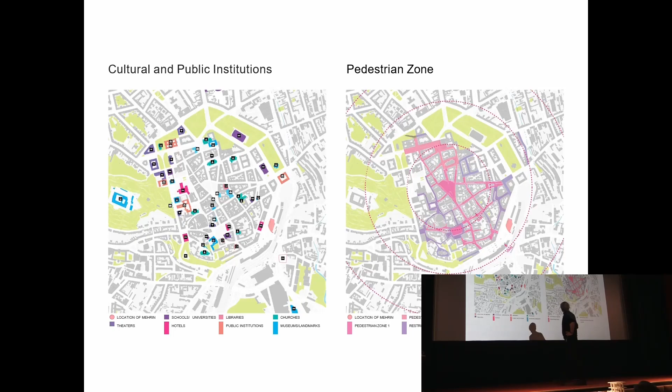It's a part of the Ringstrasse area. It is next to all kinds of political institutions, and you can walk to it. The Green Ring is not completed in a historical way. It has this kind of monument that passes by and which is beautiful and makes your story.

It is also part of the Jewish history, and for me this was kind of a challenge to understand it. How many times in your life can you get the opportunity to think about this disaster from 70 years ago, and formulate a certain kind of opinion about it? That is what you are trying to raise with this subject, and I find that wonderful.

That is challenging, and I could not say no. What I found beautiful is that the site is not just surrounded by Jewish sites or former Jewish sites, but there's also a collection of them that is in itself already worth exploring - worth understanding why it was there, how it looked, and what it has given now also these days to you. And yes, also Tugendhat belongs to that.

The reference is actually much deeper than you can imagine, and then you try to symbolize it sometimes in this kind of manner. Is that good enough? The challenge of Mehrin is to see it wider. The Moravian Jewish history is even more - you can say that maybe 40% of Brno's urbanism was done by Jewish developments. And how loudly can we say that?

Because when the Jewish population left during the war for all kinds of reasons, afterwards this expropriation continued in the communist time in a strange way, so you get a double reaction on this situation, much stronger than anywhere else in the world. That makes a necessity for this kind of living with it, unveiling those paradoxes and all the sentiments that are in it.

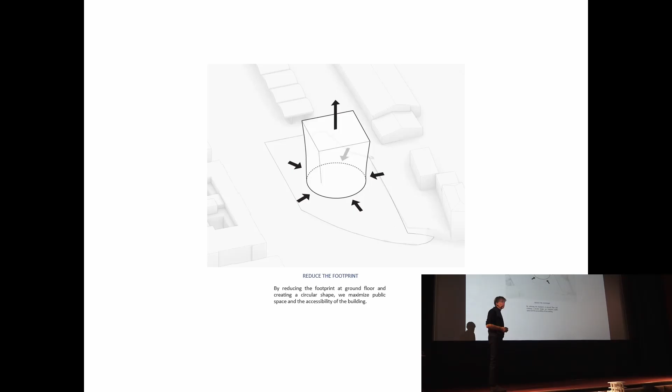So we reduce the footprint to give some space around it, so that when you cross a zebra crossing, you first find a kind of garden or plaza where things could happen. Do it as abstract as possible, so that you can walk around it - no corners, please.

And then stretch out to maybe a new viewing platform where I can notate all this history. Actually I walk on a glass map where I can see which town was doing what - interactive - and it could turn into this platform that you want to go to and have this view over the city that's described, and the landscape that stretches to all ends. And somehow, if you make that as a journey from its abstraction ultimately to its cohesion, then maybe there is a message there.

Maybe it's also an attempt to talk about minorities in a general way, to give them the space to note data, to make those maps, and to feel it then in this collective platform where you can dance on top of the map.

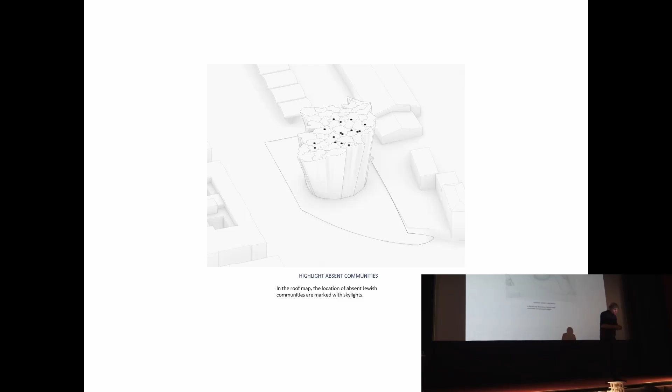In that map, there are all these kinds of towns. They can light up in the Jewish epoch. Okay, let's give them a place. Let's also see them as things that you can stretch down towards the kind of hall.

So when you enter on the lowest floor, there's this kind of new cupola that's constructed by lights to a distance, and that gives a signal that it is a Jewish institution, but it's more than that.

It also dissolves maybe in this new kind of plaza on the ground floor, and it points at something in heaven. Here you see how the domes come together in this new cupola, how the entrances work, and how it also opens up the veil by these kinds of new plazas that are there. You can insert the transport into these cupolas, and the different programs are arranged.

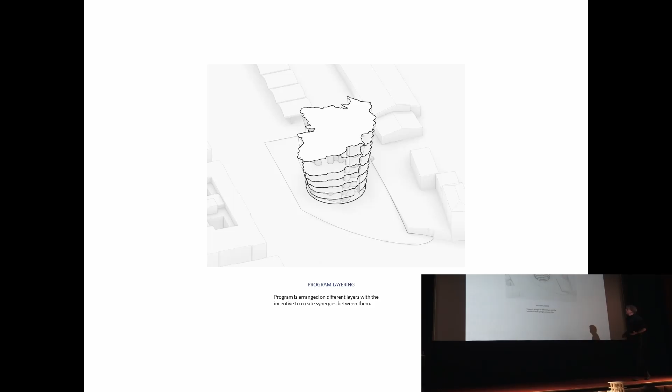This is a journey through the documentary system, through the library, through the education part, and through the museum itself, from the bottom to the top, coming out on this dance floor at the top, positioned in the ring.

That's the construct - a paradox of the past and of the future is somehow there, suggesting abstraction and being concrete as much as possible, so that it escapes from the kind of corporate buildings normally done for these Holocaust institutes - it escapes, but not too much.

I'm not going to make a kind of monumentalism out of it. It is a subtle suggestion that makes that possible and that creates that journey from the bottom to the top.

Where could we imagine such a kind of space then? It adds to the cupolas in Brno's culture of the past.

And then here, the small film - how that could be, that feeling, this veil that comes from abstraction to concreteness, how these stars of the past are somehow illuminated from the top, and how they ultimately illuminate this new cupola in your city - let's say, our dream.

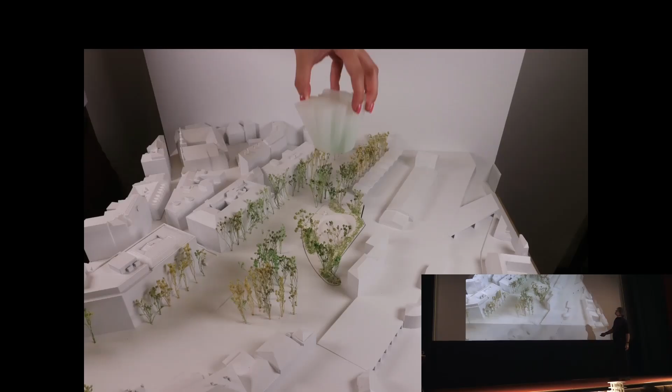And that leads then to a position that on this spot was what we tried to do, and to give this platform to the world that blends you with the environment.

And when you walk around it over time, this is how this veil shows itself to the surroundings. You can see it when you drive around on your bike or in your car every day, as something that then almost moves, illuminated from below. This is how it can then turn into a lantern in that city.

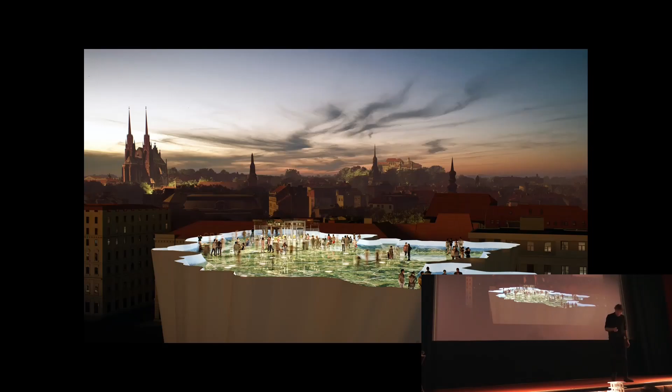Suggestive, yes, as a kind of new lamp that would exist there, leading to this kind of party on top, placed in this area. I hope it gives a construct for how to live together, how to go through this journey, ending up in this glass map that becomes a platform for your city, helping understand the position of Moravia in the wider context. In the railings, the story goes further, pointing at Warsaw, or at Amsterdam at a certain moment, to describe this study even more when we make this kind of suggestion.

So what's next? You have chosen for this at the moment. With all respect, we are friends, but honestly I think it's a bit of a pity. I'm a bad loser, I know. But is a spiral really the ultimate way of symbolizing such an anachronism of time? Is this unveiling what could be done? Just a question. I know it's late, but it would be good to discuss among you what is the best you can have, and how to create, in next steps, a little help in keeping on with it, making these kinds of objects that discuss your situation and your position in Europe and in a wider context. So what is next is my next chapter on it.

It's as if almost the evolutionary comes alive, and evolution is what we are talking about. I think architecture should be about that. If I talk about mirroring, then it's exactly about this evolution in time and welcoming that direction.

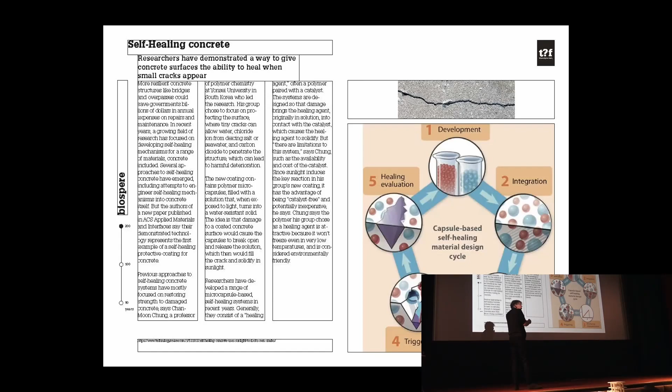So these timelines also can be characterized by different functions. Self-healing, we want to do that much more. This is all the elements we need in the coming 200 years to ask from our concrete industry to do something better than they have done before. And that leads also to structures that repair themselves.

And we have to know that minimally 40% of our existing buildings, in 40 years from now, we have to repair and change into another direction. New plans come in, new networks come in.

I think the mycelium deserves much more honesty and much more working out in biochemical terms, and that could lead also to another kind of way of treating that kind of component.

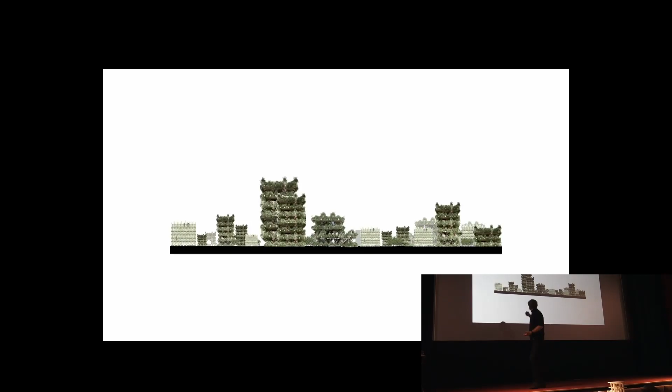And finally, of course, we have to do it with plants, with the biology. Also this kind of sequence of training the plants and being active and being quicker could lead then to much nicer things than the Torre del Bosco that are now coming up, and leads to probably more freedom. It looks like a history that is actually endless, is what we construct.

And if some of you say at the moment that Prague should be always Baroque, what I saw in an exhibition in Prague, I wonder, come on, it's more than Baroque, isn't it? So where do I miss the brutalism in it? I think actually this discussion and the evolution on it is what the beauty is of our cultures, to make it endless. It stages also inventions, not only interventions, but here we can find innovations to do that.

And then history becomes high story. So it's a kind of, it has more a pleasant name, is what I would propose for your universities, to give it a twist. Chapter 4, what's next?

I'm now, for a moment, at the authors, because I started in the meantime, but say it was '92 that I started together with Jacob and Natalie this firm, which has, you can see us here, more people come in, and we're now working on more places, do more stuff. So in these 30 years, you can do things.

I'd say that also to students. You can exactly do it. I mean, 30 years ago, I was here in Tugendhat for the first time, and I saw the Mies. No, it was 35 years. And you see the changes that are there. Now someone brought me around and is probably in 35 years doing similar, say, compositions as us.

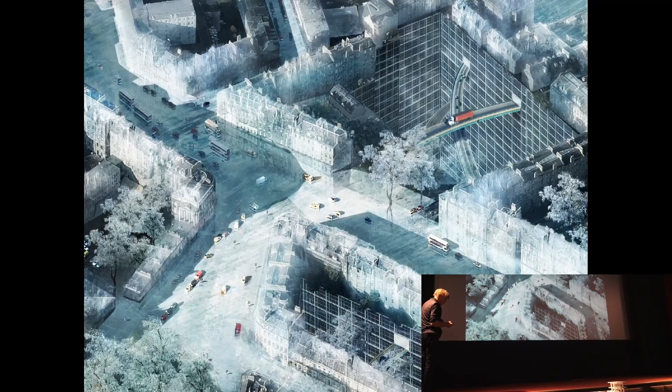And how boring is that? I dream of the moment when there are so many of these neo-architectural houses that the market collapses. That is what happens, because then scarcity of modernity comes in again, so we can deal with it. So it's about freezing - this image shows that a bit, how do we freeze and where do we open up? The word 're' came also in as a motor of discussion where we need visionary thinking in that way.

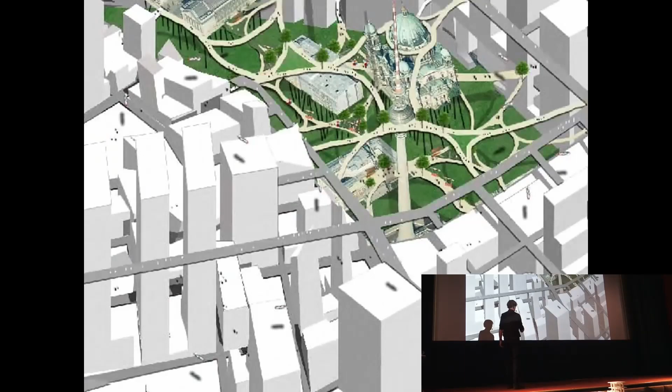Look to Dahlem-Dorf, quite a Nazi area in Berlin in those days, but imagine... oh, this goes too quick. This is funny, did I do that? It is filmic, that's true, but you're going back a bit.

Okay, something is happening in Dahlem that we wanted to go quickly through. You could imagine that due to new freedoms, due to climates, Dahlem would shrink and turn into a completely other settlement in about 200 years - one hypothesis of a student group to think about it, turning ultimately into this kind of cityscape.

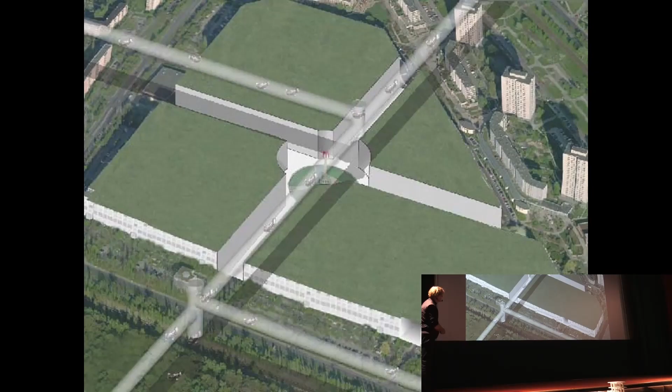Marzahn, which is phenomenal - it's a bit like Cosmonautu in Prague, but quite hip and quite social, and it turns into an enormous shopping mall at the very moment. It has maybe other kinds of transport inspired by it, and it could gradually turn into such a kind of dream. The Museum Insel, how does that look like?

Does it become more singular? Does it stress itself by itself? Is it more strong because of capitalism? That the Insel almost is the last leftover of that epoch - is that what is going to happen?

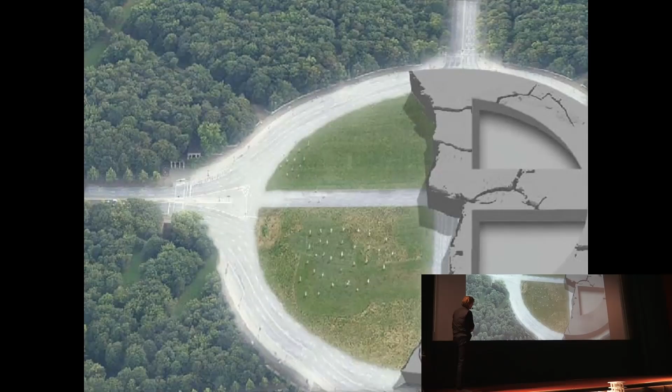The Nikolai Viertel is claiming that church as a frozen element in a liberty of the rest. Potsdamer Platz, that became so big, and then fell down because of a new kind of global crisis, and turned into this pit. The Spree - can that really be the motor of the Berlin exercise, or transform into a new El Dorado? Can the Reichstag survive after all that, or will it be a symbol of the breaking of the European Union, etc.? It was as if that exercise showed a bit the lightness of being of that history with this overview of potential.

So what is next? 2014 - I was working also in Berlin, on the Kurfürstendamm.

And you have this building, which was for the Hitlerjugend, and was at a certain moment heavy as it is. What can we do with that and turn it into a livable zone? That is here on the Kudamm - commercial, after the Friedrichstrasse, to invent it again.

So it is actually completely fake. Everything is out of steel, and it's made with this neoclassical element, say 300 meters long, stretching through the Kudamm to the other side.

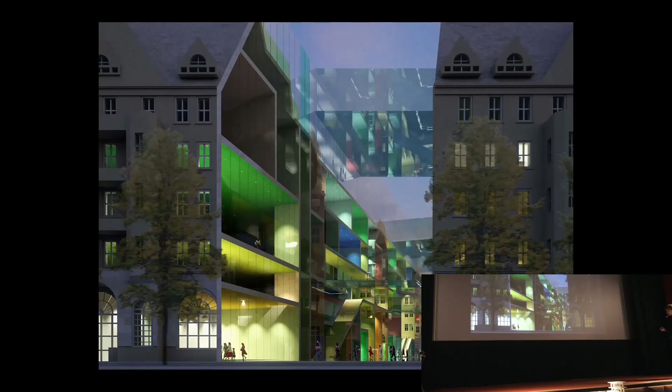So in order to open it up, I behaved a little bit like an artist. I took my knife and said maybe the best is to simply cut a street through it, so that you can see the courtyard and expose the section of the building, which turns into a kind of demonstration of the Disneyism of that Nazi epoch, turning it again into a destination where you're surrounded by this inhabitation - a kind of cut Berlin, as a proposal to live with it or to dissect it from and with its past.

We didn't get it in the end - the mayor there didn't want it, and it became actually a very unused element these days.

So, now we are talking about the new old, when we are talking about that procedure in the Why Factory, to think about past and future, intersected with this knife act. Then with the new old project in the Why Factory, we try to think about aging.

So there's a list of things, programs that we can look at - how old can they become? There's an economical value, there's a social value in it, there's an ecological value. And there are many factors that are defining the issue of oldness, from money to circularity to decision-making process.

So we try to make sense of that and understand it. We gave it a timeline and categorized which things stay forever, which things stay short. Facades last not 25 years, and interiors last 9 years - that's what the times are doing. We went on to sizing.

Some things are so big, but need also so much time - I mean the issue of rivers that dry out, that is a long time, and it's a big element to think about, time and monumentalization, what they need. Whereas other things are very small, things that also want to be monumentalized.

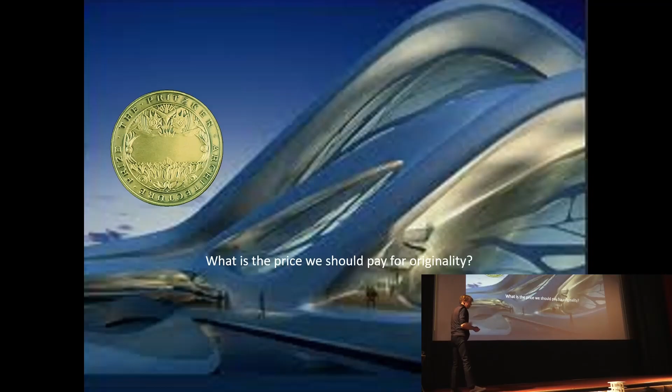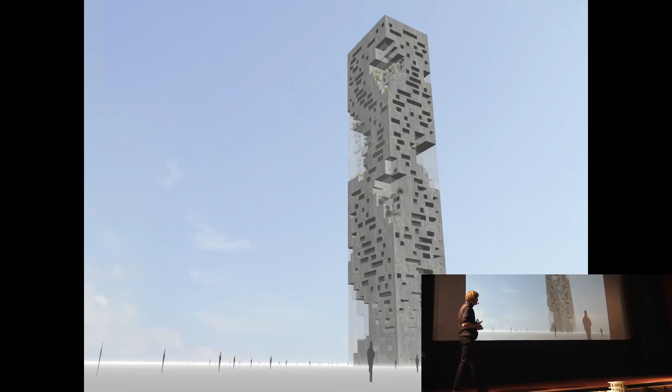And that is, in this case, this is an urbanistic plan, by making houses that are real, where Vitra is about showing a potential element. So we do things together, but we believe, I think, also in the same agenda. In the case of big buildings that become small, in the stacked housing or the vertical village.

That's more, it's of course funny examples. France and this in Australia for an Aboriginal community. Wow, actually it's quite strong if you can do that. There's this black version, I never would have dared to do that. How can you approach an inclusivity in this way?

Not everybody believes in originality. Hilberseimer went on with this kind of drawings. New Istanbul looks like this endlessly. In the meantime, we arrange originality more and more through this kind of consumer products that personalize itself.

Of course, copying was already part of art, a lot of it in our museum. So simply, there is a culture there, or there is a discussion on how originality can be done. And architects are a bit stupid normally, because originality, so you want to be original. And everything that looks similar is immediately killed in our press.

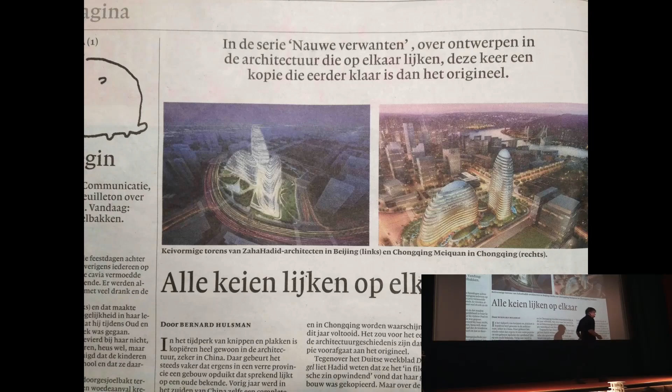In the meantime, this journalist, I love this, he made only articles about this. Who is the Zaha of this too? Was a question, and then it turned out that it was someone else that made this.

Also, our market hall, and then this one in Florida, was immediately compared. I didn't know about the building, to be honest, but okay, fine, fair enough. It's kind of, we are there. It's good critical composition to look at things that are there. So there are hundreds of articles that we analyzed and that are in the book.

It is also like copy-paste is about copyright. What is right and wrong? So we looked not only at examples, there are laws and ethics that are in that suggestion. There's a world of patenting that also Rem Koolhaas at that moment tried to do.

So we worked further to think more about copying in a way, or copying is actually referencing. If I were a medical scientist, I would have to refer, because what one did with heart attack research, I can only improve it a little bit. And then I got a Nobel Prize because I did it better. So why don't architects do that also? Make those references more clear, but also say what is better, what was bad about that kind of elements.

That would be advice, especially for the schools in Prague, to do that. I guess you don't do that. No, you have to do that. You are the Rotterdam of Czech Republic, so you are more free than Prague, I hope.

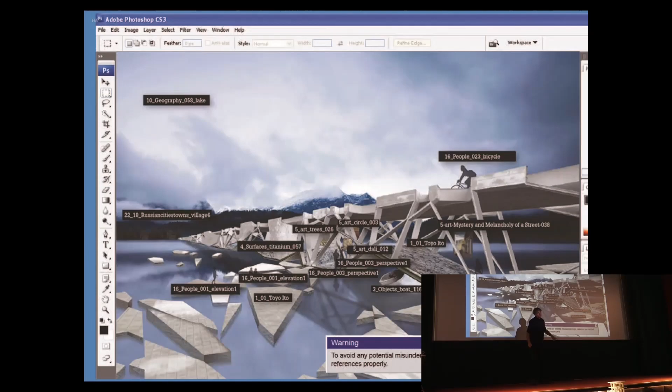So this was an exercise about photoshopping. What are the tools? You have a library in Photoshop where you can put things in and order them, then start to group how that could look. Here's a process of gradually photoshopping a building, in this case for a person, and you see coding appearing of things shopped in from Toyo Ito or from others, but it was better than Toyo at that moment. This was the group that did it.

I just take you for a moment to the film because I like it so. Is there sound? There was sound.

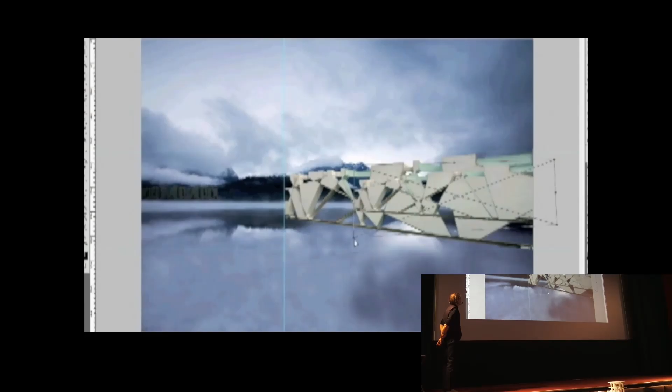Like in the small Russian city will be the location of the monument. The project itself will be derived from a building that expresses energy. We use the facade of the building for our monument. At this stage appears the function of the monument. People experience change in time by sailing from the old city to the modern monument. The building facade is made of steel, expressing the strength of the Russian general. But the experience of traveling through time can be more intense. So we try to let the landmark become clearer by stacking and turning the building. Eventually we transformed it into a bridge. In this way, the experience of change in time will become more intense.

It was as if this whole operation was coded and turned into the DNA of this project. It's ironic, I know, but on the other hand, this is part of our current practice, to work on this way of communicating with what others are doing, and interfering in history is what we're basically doing.

Another project we do in the copy-paste book is El Croquet. You know El Croquis, and we asked them, can we do one issue of El Croquis about copying? We called it El Croquet. You can see how one building in Amsterdam, if you do it 20 times, you get a fantastic skyscraper. How you demontage a block from the 60s, and then you have the nicest building I could imagine, in Ostrava, something like that. Or if Sanaa finally makes towers, which she doesn't because it's not humble to do that, then somehow you get this. And this is my love for the building, the competition for the park around Saarinen, and this arch in the middle of the US. Just add one extra, and the whole world will know you.

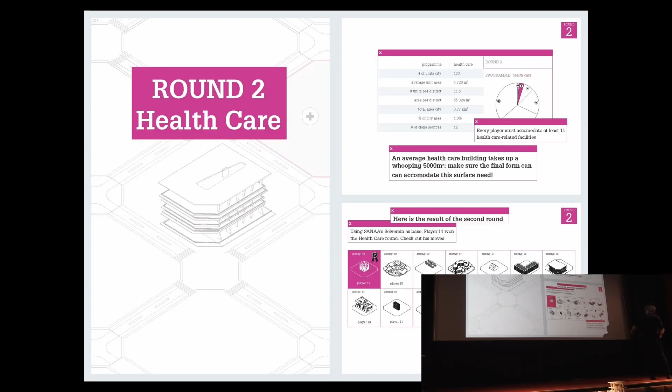We made a game of clones. That is basically, if you want to make a city, you make a game that tests certain kinds of topologies. Here you see what kind of things you could test. You could take a building of OMA, and in 6 rounds you have to compete with other typologies to see how it survives under different programs. For instance, culture, round number 1: how would this building of Herzog and de Meuron resist versus other buildings of other players doing that? In round 2, healthcare: is that building in Miami equipped for that, or is Sanaa better? Also for education, who fits better? Who does well in shopping, and what does well in office or housing at that moment? The funny thing is, it gets a winner. This typology became the best and most applicable under this kind of criteria, and others became not so good.

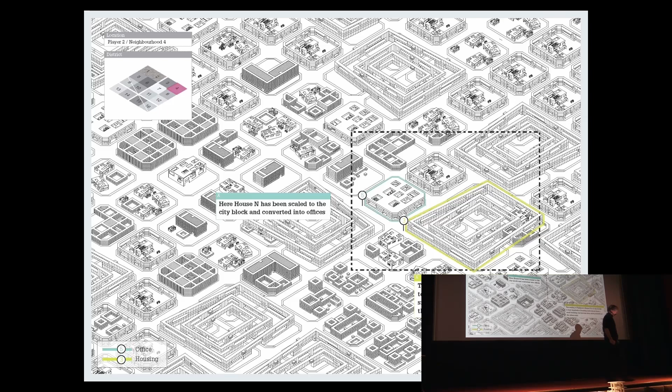What we then show in that game is basically that the battle game is shown in this kind of format. You go into the neighborhood, you see how they're used in different moments in time, how much success they got and how many blocks they got, and a fantastic new kind of Barcelona comes alive, such a city. So gaming is part of our understanding of who is the best, who is the fittest in typological terms, which is what this game of clones is suggesting.

Ultimately, it's about generation. It has two words, generating and generations, which is what we are dealing with. So again, using all this knowledge in our software, basically in Revit, to see how the search for this originality can be made.

Starting with knowing ancestors, you can see on this slide how there are movements from the ancestor type to different directions, developing a kind of code of the operations you do, like we showed in the copy-paste, that's also happening in this model. If you do that for every type, from the cube, I can come to this, and this, in these formal actions symbolized by, and that positions the work. If you do that, you get this as a kind of toolbox that generates this new step, which is what this generator is suggesting.

Chapter 7: what's next? I go to interpretations. First about generation, about referring - that was chapter 6. Now about interpreting history, which is what is before.

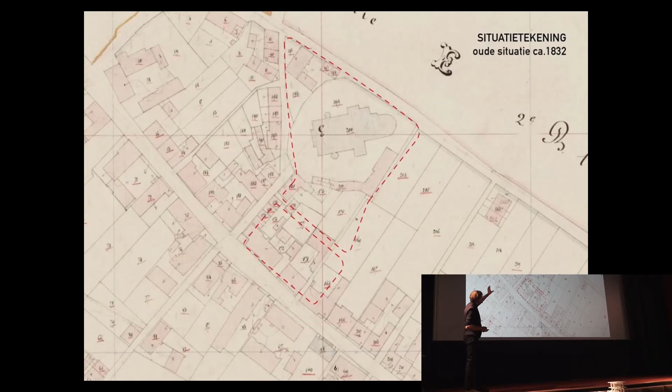That is what's next. Thirty years later, he called me and said, now it's time to do it. You made some buildings over the world, so maybe it's good that Schijndel - what's in a name - can do it. This was the old map of Schijndel, with all the old houses, quite cute, and then boom, this bombardment came in. They made modern urbanism, stretched everything out, and you ended up with this non-hard result. So from this to this was the step.

What can you then do? He asked me, what's the target? Yeah, people should know Schijndel. Okay, the easiest option is to make a tower of 400 meters so you can see it from Paris. They took that seriously for a year, up to the moment the alderman had to leave because it was impossible. Then he had one last chance to deal with it, and now you have to do it with the complete council.

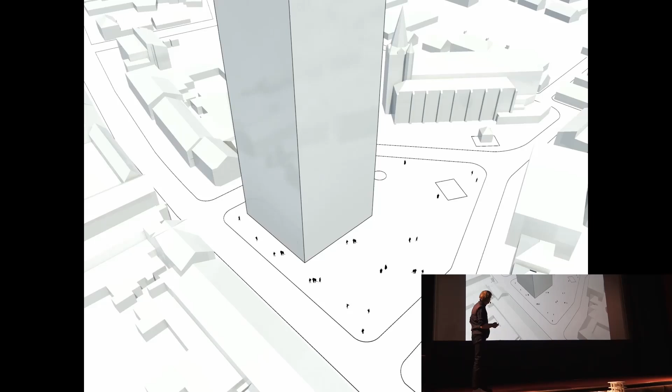There are 17 parties in the Netherlands, so imagine the cacophony every Thursday evening when you go there. What they asked me - how big should the building be? Not too high. How long should it be, like this, or like this? No, in between. How thick, this, or this? No. Endless height, same thing - not too high, should look like a neighbor. So what they chose after all the sessions is this.

Okay, this is done, that's the result. Funnily, if you look at Schijndel, everything looks like this - this is how the buildings look. You make photographs of them and start to see what they have in common, where they are. We take one, measure it with this scanning technique, calculate everything, and we calculated the average of all these 500 buildings that are there - this is the average.

That's actually interesting, because it's half of what they want - this is Freudian, of course, they want to be bigger. So they immediately said, okay, that's a good idea, let's make the biggest glass house, the biggest house thinkable. Imagine doors that are higher than this. They said this shows that we want to be bigger. Yes, you don't want to have a skyscraper, so you end up with a double farmhouse.

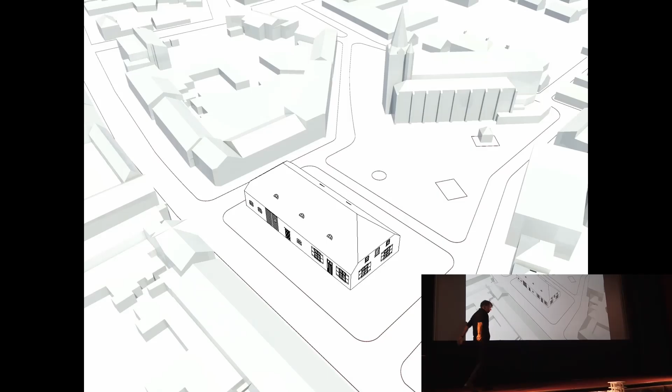It's ironic, no? Yes, but irony can be perfect in architecture because it says something different. Okay, we take it, but then normal material, yeah, no problem - what is that? Bricks, straw for the wood, and glass. Glass, oh yeah, glass is okay.

So you can see here how it is, how it's the average farm - we made pictures of all the farms and blended it in, how the windows are, made a garden around it. But yeah, in the end we did it in one material, because that was the choice.

He said, you took a trick, because now we make maybe an art object out of this - you make the biggest glass farm ever done. Yeah, but look, here I can work with an artist to show everything. It's architecture of 2 millimeters that we are doing, and a history of 2 millimeters. Everything comes together in this print technique, and in the interior you have the biggest rose window of the Netherlands.

So if I go in, I always see your farm, I see your history, the average part of the history. Even if I wash my hands or go to the toilet, it's part of the game. It is as if this is the holy farm that we could make that competes with the cathedral of the whole area.

And then yes, it's a scale like this, it has some commercial functions in it. It is a transformation of the city towards the building, which is what we tried to do in this situation. And it became a lantern that is showing itself. It caused a fight to get this, because is it alien or is it actually sublime? And now, when you go there, tourists are there.

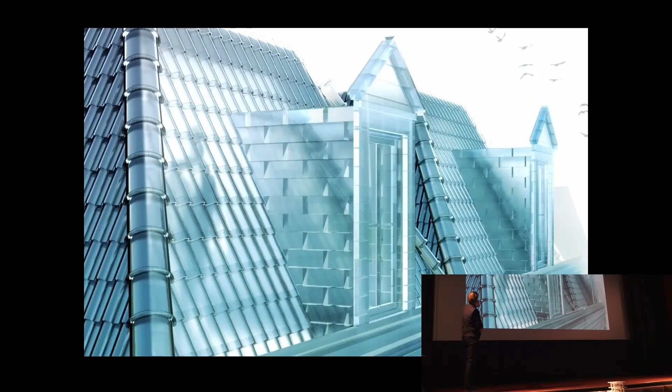Oh, how much? We asked. Yeah, we don't know. So we investigated all around how much percentage is brick. You see, 36% of the facade is brick here, 16% there. So we ended up with 21% as the average. So we said, okay, what can we do here?

This is what we wish. But yeah, you don't. You want actually this, but I'm not going to build this. So in the end, we ended up with this 20% formula to have that expressed in it.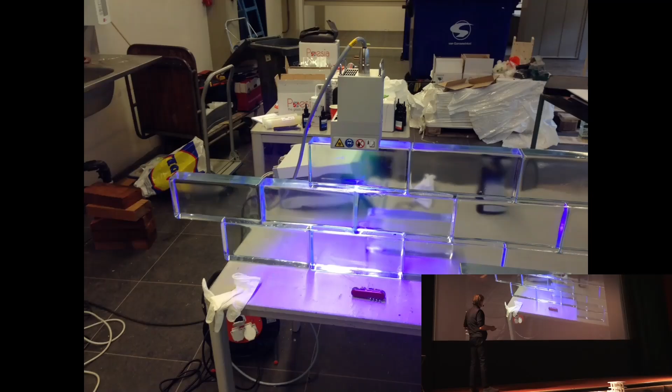Okay, you have to prove it. You go to Venice, you talk with one company that makes glass, and they did it 5 times in the process. But you can remelt it, so again the word 're' comes in. You glue it together, and we needed this kind of dentist-level precision to find a good glue. So these Italian girls that made these crowns worked with these engineers to test it, to see how that would work. Super expensive stuff. And with the UV value, we pushed it again.

Okay, it works. These are the powers. In red, we have to do something, because it needs to be stiffer. So we need to add beams on the back of it to give it this kind of stability. Blue, so it's okay, so we go further. Also, the wood panels come in.

This is next to Schiphol Airport, the big hall where we put all the stuff together and montage it in. You get also the windows—oh, I forgot the beams on that part, still red. So we glued in these arches, which I think are the most beautiful part of that building, and that glues together. Then the most expensive part is the gradual transformation.

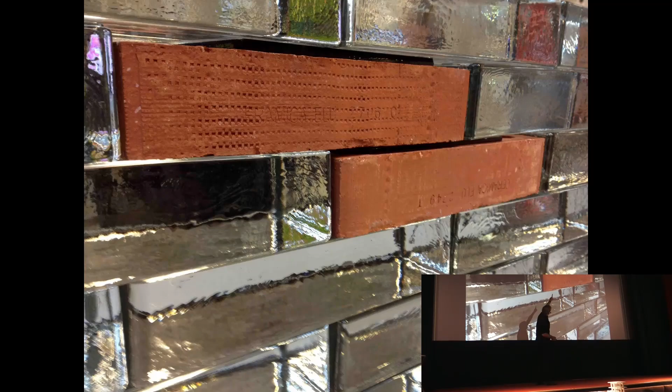How do you glue brick on glass? You know that it's impossible, so we have to glassify the core of the brick to make it work.

I still love these two years that we spent on the site, because every brick needs two hours to dry. So imagine these people with tattoos, thick fingers, carefully doing it, while the Italian girls are checking that every crown is well positioned. It has a kind of poetry, I think, that we have to achieve also in our production processes.

So what is next? Now you see here how this glassification is monumental. It's the youngest monument of Amsterdam, which I'm very happy to see.

So how it looks from different angles, I think that's important, so you can see sometimes solid, sometimes transparent. How people want to touch the building—I think that happens almost never—and how it looks inside.

The products of Chanel were much better after this to look at. Now it's Hermes, by the way, that comes in the end, and how it gradually moves in.

So what is next, also in the evening, again a touching point to do that. So what's next after that?

2018, I go to Moscow. Then it was still possible to go there and deal with things. It was the competition of Zaryadye that I would like to remember. Zaryadye is next to the Kremlin, an empty spot.

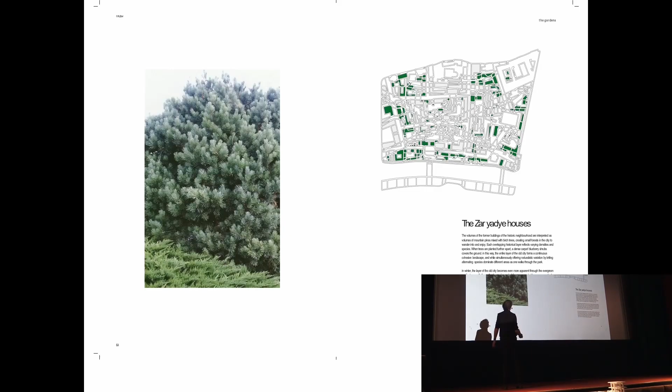Through all its parts, in combination with plants—you can see the tree gardens made in this garden. There are the houses of the Jewish community that are somehow in this zone. There are the public buildings that at a certain moment in history become these kinds of elements.

There are these courtyards that deserve treatment like this, surrounded with other kinds of buildings. The parking below was needed—it's basically a pergola where the plants and the glass are on top, so that light comes in.

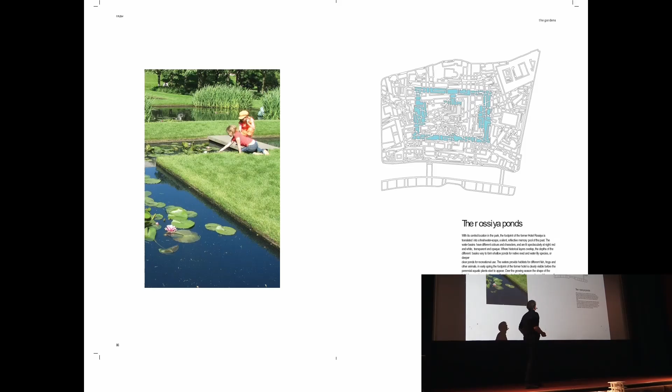In the center, the 'eighth sister' could be imagined as a hologram, so that I can walk over it and see its perspective. I can do the Rossiya Hotel in a sequence of transparent ponds where light comes from below.

And then also the promenades, the connections that would be kinds of tundras going from east to west, making viewing lines across it.

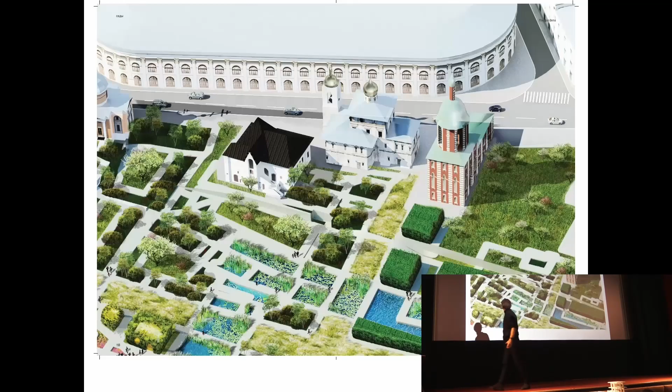So it creates a puzzle with a gateway to Moscow in the very hard hill, where you could climb and have the overview, and where the Philharmonic Hall would be simply a lifted piece of that history. That would be the new gardens of Zaryadye, leading to sequences to be together, but also to think about this past.

History has shown what is next—this is what is happening. Americans come in and make lawns like they do everywhere in suburbia, and then also in Russia, another lawn covers the history.

I'm cynical about that, to be honest. I like that the park is working - it's, of course, a place to do it, but somehow what can we do more in this act to go beyond, say, the lawn that has flown in.

So what's next is 2019, again Moscow comes in. In this case, with a Volkhonka mansion, a transformation next to the Kremlin into a hotel. It is a place that looks at the moment like this, next to this, by the way, also a copy of a building that is made on that case, with an interior that is not dominated by UNESCO, but an interior...

Pushkin also made a lot of things. These are the buildings over time in this last. So at the same moment we investigated what the building looked like in all these epochs with the different users and owners that the Volkhonka has made. And if you draw that on top of each other, then I think this is the most beautiful drawing that I could make as an architect.

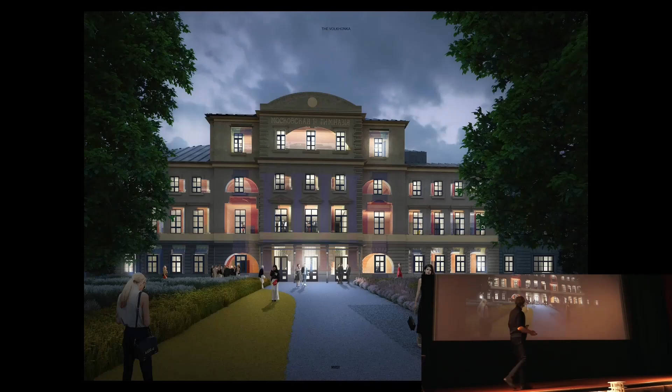Right? Because if I zoom in, then you see how, if I make that into glass, then every piece of that history becomes somehow visible in this hotel that is going to be there. So here, how to translate this beauty by showing that in the facade, in different treatments, by a room, the Palati room, where every piece of material from glass to stone celebrates a certain moment in time and leads to this kind of viewing.

How the ballroom can be imagined with its stories. How the hotel room is dealing with these notions even into the bed. Could this split, and that would then celebrate the X-ray. At the moment, it's on hold, the project, but still that would be like a way of dealing with the history and give it a place of innovation and development.

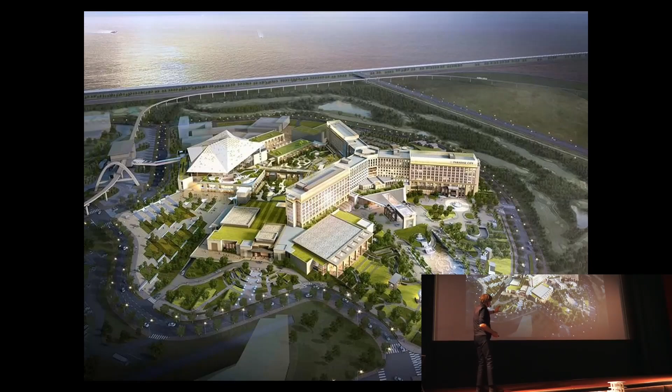2019, what is next? Seoul - I take you to Paradise Casino over there. They made this Paradise City, which is an architecture done by an American firm, looks corporate, could have been in many places over the world. And what can we do? We are asked to make two things: one casino and one nightclub for MGM, and an entertainment center to do that.

So these are the two boxes. We had to, for many reasons, bend this to connect it. And we thought, what is a nightlife during the day? I think we should do something like Chirico's painting, that you enjoy basically surroundings that are horrible. If you go to Vegas during the day, it's terrible, but in the night it becomes alive.

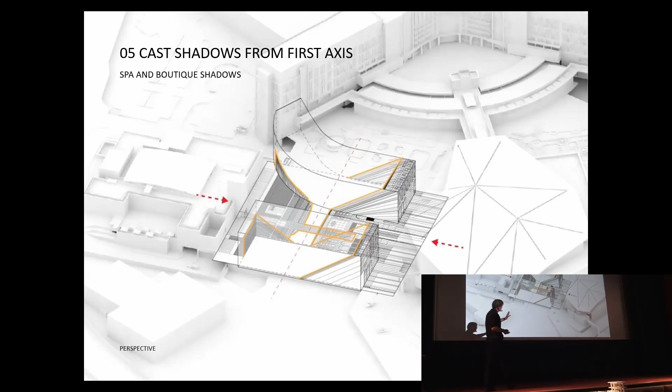So how can we do that? We projected all the facades of the neighbors onto our building, so that somehow you feel that we are in a city, in urbanism, where these things relate, and not in a kind of mainly golden element. And here's how we open it up where needed. We had one spotlight, so when you land in Seoul, you can see it in this corner, the entrance, and that is then what we added to it.

How does it look like? So here you see one of the entrances. I go further around the corner. I see how the relationship is between this and that one. The imprint of the neighbor is there - I'm neutral in its architecture, and somehow it becomes part of the walk. It is as if it belongs there, but gives it a twist.

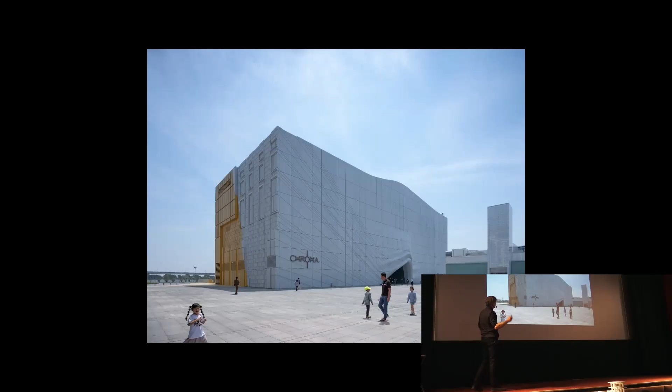How the spotlight is working, the detailing of that imprint, including the doors for the nightlife, how it's lifted at a certain moment so that the nightlife becomes more visible, and what effect that has on the imprint. If I go over the corner, I can see it even more there, and also this lifting act leads to a super interactive installation for the entrance to the disco. And leads to that - so in the evening, this kind of austerity becomes more alive and leads to this kind of cohesion.

So also in that kind of environment, you can sometimes try to cohere and turn it from an object into a city, and the history comes alive.

I end with the last one, the Beekvliet. What is that? The Beekvliet is my old school, but the school is a bit old - 1798, written in this book. It started as a priest's education seminary. It led to this endless complex. It was the hostage camp in the Netherlands in World War II, and it had a lot of history.

So also in '76 I was there, on the sports field. I think you can see me somewhere there.

So what's next? A couple of years ago, we were asked to look at the extension and to see what that building could look like.

Everything has changed in Roman Catholic Netherlands. So, with a canteen, what to do?

So we ended up with a renovation, a very simple new aula to make a space where the tribune would celebrate the gathering, and extends the library up to the end. There's not much money, so you cannot do too much, but it's a nice space. We painted it blue, so it became the Blauwzaal, the blue hall, Bluela, and that in a way is calm, chosen by the students.

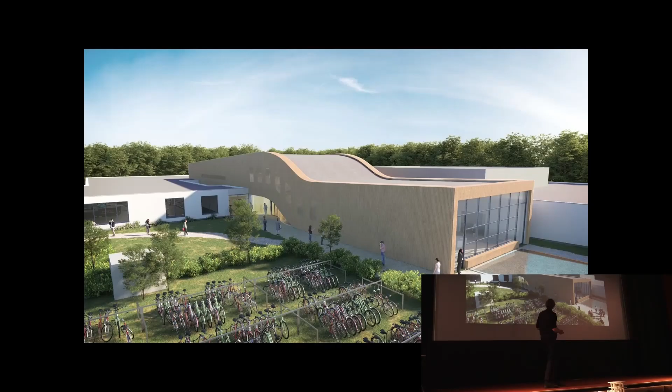But we found, of course, in this email, that it misses something. So what can we do? We said, can we not do something more interactive? So a month later, we gave this as a canvas for discussion, and we said, what can we do?

So the students start to talk about what they want to show, something about Homer, something about the Greeks. They had a lot of ideas about things that should come back from the whole area, from the people who came from different villages and different pieces of the history. Couldn't we put that in place?

So we made a map of all the stories that the students have made, from old students to new students, and that's what it is. And we said, can't we project that on the building?

Here you see it happening on that facade, together with Canadian artists. It comes to a zenith point, an apex as we call it, and then it goes up in a sorting device to a position. And then you see the names of all these contributions.

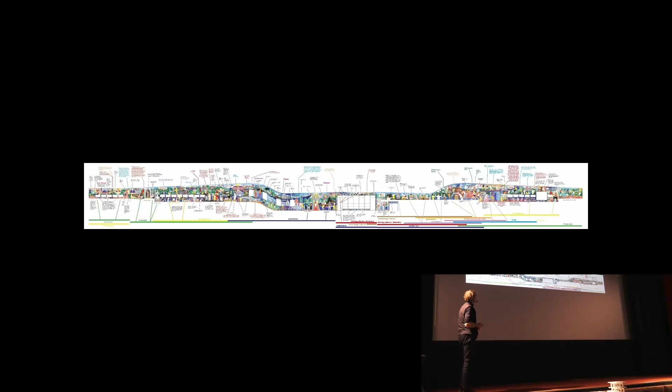They are turned into stickers, into design elements, so you can go on with your history, and then history starts to show itself of this school, a bit like 'The Secret History' by Donna Tartt, a little different than other kinds of schools.

And what you can see here are these images emerging, how it all comes together in the entrance hall, where you can see how all these elements are montaged in and directed towards their position and how it could look like.

This led to almost like a movement of resistance in the village. This was too much, too colorful, whatever. So we blended the colors a bit, to be honest, to adapt to it.

You know, the Blauwzaal, how it is, and then applied it over the last months. So you can see now how it's gradually emerging and becoming like an object that summarizes the history of this school. And the project also contains stickers that can go over it.

So every year there are a couple of new stories to be added. It has a website where you can see the stories, and it's a way to deal with the history of that part and to go further with its character, to hear how this party place is coming alive.

So, are you tired? Shall I still finish with another part of the history? There are two elements still to say. It could go quicker, but that's how it is.

So what's next? Extensions are another technique of thinking about the continuation of history. So again, what was before? I take you to minus 2600 to start this piece of the story.

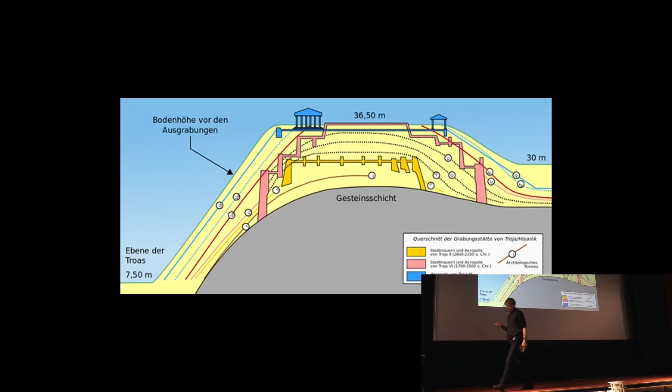What happened at that moment in Troy? I was already talking about Trojan horses, but you can see it when you go to Troy. This is the city, and this is from above. And this is the section of the city with all these towns on top of each other. I find that beautiful. This is how one of the most intriguing cities comes to your fantasies, basically.

And if you make a map out of it, this is what we, at that moment, also did in Moscow, you can say, but to deal with that. But it's also about extension. So what's next?

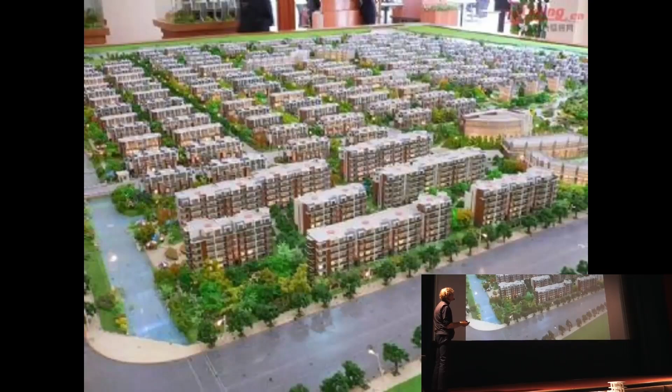So what's next? In 2012, the Vertical Village project came out of this desire of developers, but confronted with a young generation that wants this kind of houses, it turned into a stack. After many years, next year it will be realized. I'm super happy and proud that it can be there, to have a kind of vertical density that is human and extends almost, showing the history of making. Participation is very clearly visible in that project.

So what is next? We did that with a village a little bit. On top of this house we made a village, as a test to show that we can extend history in the UNESCO zone but give it another color. I put it in the committee only as black and white drawings and put a RAL color on the corner, but it went through. That was good because it looked old, so it was kind of good. We advertise this basically from everywhere in the city. You can see this blue thing as a technology or technique to densify our environment.

But what is next? 2022. That's what's happening now. We are working on the complete roof plan of Rotterdam. There's 18 square kilometers of flat roofs because of the bombardment. There are none, so what to do there? We investigate some kind of software, some of the students were doing that, called Solarscape. If you densify, but you have to cut it because of the sun, you get this kind of beauty with this kind of programming in it, and it becomes the next envelope that we could imagine for the settlement.

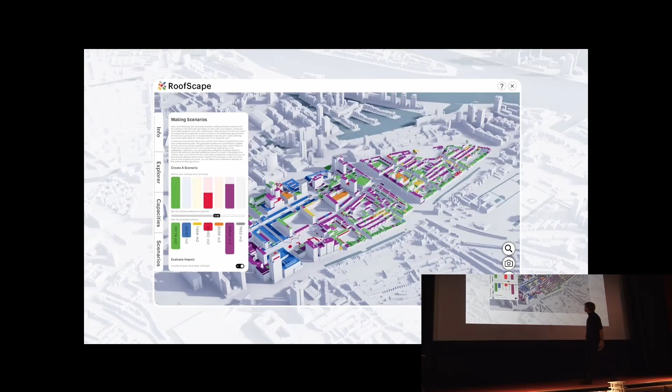The second element is the roofscape, basically an inventory of laws, construction techniques, and also real estate value, and that makes these kinds of categories of roofs come alive. Then we make examples of what you can do with the different typologies, just starting with like this, or you add that. A complete catalog has been made that transforms, then gradually this addition could spread over Rotterdam. I think that took a while to get it.

But the second layer of Rotterdam, this new Troy that could be imagined, is soon there. The bridge we made half a year ago is part of that operation, to show that you can go over the buildings, that you can actually construct it. This is the mini version of Metropolis by Fritz Lang. You can walk over it and meet each other, it creates these picture points. And you can test different vegetations and different treatments.

It leads also to a new act in Rotterdam, that every new roof should be thicker, so that we can do this more easily in the future, this kind of new village that could come on top. I'm very happy that that is installed. So the relationship between juridical instruments and architecture is much stronger than you think, and also how to deal with history but give it meaning, is what this wants to do.

What was before, again, I want to show what the students also worked upon. I was in '87, there was this Indesem, you see me here with some other students. You see Herman Hertzberger in this position, you see Aldo van Eyck, and you see Rem Koolhaas at the same moment. So I was, of course, a kid of these three characters, where Rem was about metropolitan thinking, Herman was about social thinking, and Aldo van Eyck was about the in-between space between everything.

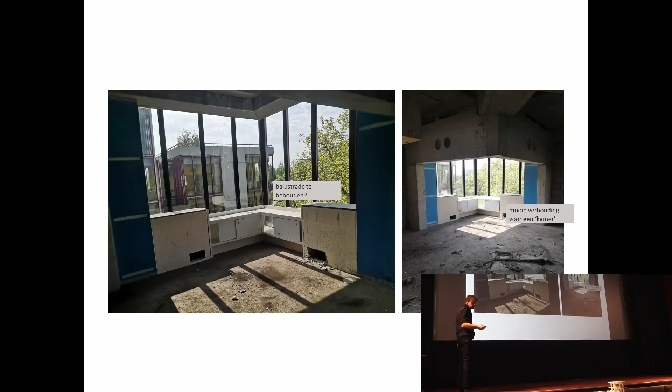But what's the situation at the moment? It looks like the Borobudur of the Netherlands - it has this jungle covering the side. The facades are terribly treated at the moment. Inside it's leaking everywhere, it is squatted in all the way. There's things that could be much more improved, the roof terraces are leaking. Beautiful design elements in the gardens, in the jungle still, that are done.

So can't we do something? With Herman we worked on what kind of concept we can do, and with my client. The client didn't want to meet Herman because he couldn't talk with him - no, he's too old and too stubborn. So you become a mediator - that happens a lot in history. So you mediate in time, and that's what's happening here at the office. How to deal with that?

So what is next? Herman made a text, and he said what is most important in this building is that it's not a fixed building, but that it can become a city as such. He stresses that with certain quotes. This is important because an architect who is alive still has the IP rights. So even if this becomes a monument, he or she still has the right to change it. So we're at the right moment in time, and he's 90, so I have to hurry up to get it arranged - his ideology of keeping a structure, but a changeable structure, as a main tool. So how to do that?

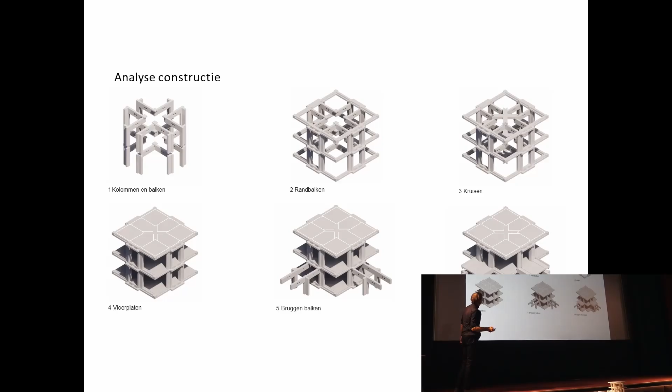This is the base of this centrale here. This is the structure that also the students have analyzed very beautifully, which is very complex, to keep open corners is what it basically says. This is the X-ray of that building. Whoa, I think this is different than in Moscow, but it's nice.

So then you get rid of the technology tower, which is a horrible thing. You extend the circulation inside to the outside so it becomes almost urbanism, and you optimize the daylight by cutting away pieces - not the structure as we calculated, but basically the floors. And that led then to this kind of studies.

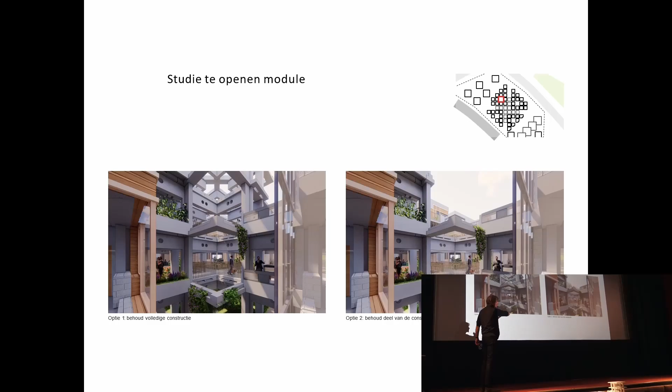So can we still keep that, or should we go lower, and how much do we have to go to make it a place where you can also live in? That's because that has another kind of law category than offices, and that's what leads to this kind of spaces and kind of dreams that we are doing.

We start to program it - it's like 60% housing, but also breeding places that should be in. We added some extra villas on the top, and then you get this kind of result, doing everything in wood. Herman did it in bricks - okay, fine, but you can see it here. And then the rest we do in wood. That's what you see in this

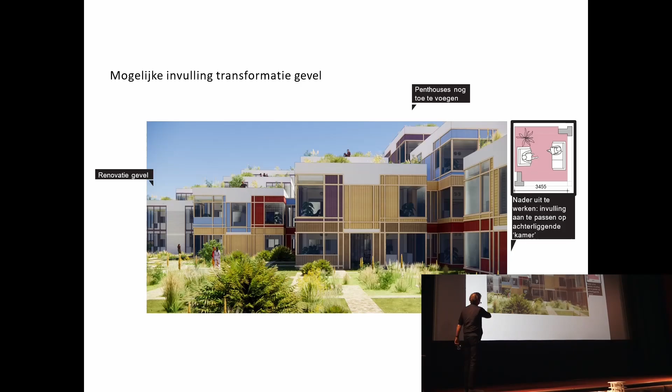photo montage. Here are the different houses, how to live in it. So there's a beautiful way to live in it. This is the H house, the Herman house, I think a beautiful example of having wings even in it. And you give, say, a palette of material to the inhabitants who come to make within certain rules - because it's between rules and freedom, to have this kind of exploration and get it done.

So what's next? This has to be paid. This costs about 60 million euros, and the client doesn't want to pay for it. And we have no monuments money in this case. So what to do then?

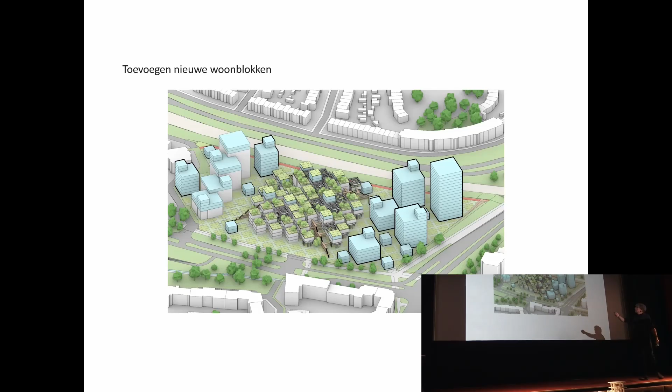So it somehow makes an assemblage with the rock. It doesn't look for contrast, it wants to continue. This is a zoning plan at the moment, and we are working on the rules of these houses to make that affordable.

2022, Herman becomes 90. Here he is. In my space in Delft, we looked at the debate, trying to tell stories about 90 years to grasp what he thinks that evening, and to see if continuation would be thinkable after 90 years. We ended up with some cake, cut it and gave it to him as a kind of celebration of this continuation act that we are doing.

What's next? I take you to Amsterdam, because this example of Hertzberger went to the National Monuments Act. He said, we have more problems. And here, I take you to Tripolis.

Built in 1994. Where is it on this screen? Here. It's the last building of Aldo van Eyck. He made the orphanage, and he made that one. It's not that beautiful, it's okay-ish, but no one wants to rent it.

So we thought it was a good idea to clean it up and get companies in that are a bit hip, and now the European Uber comes in, and also compensate again because it's a lower price, such a kind of with a new building.

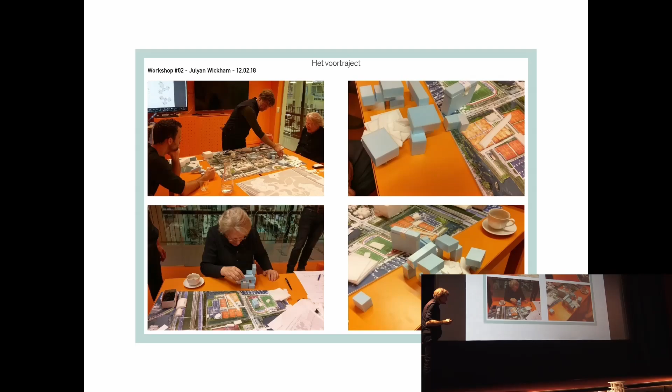The daughter of Aldo is still alive, a very fantastic woman of 85 with her husband, a British architect. We developed it further.

So we worked with his sketches, these are the interiors, to open it up, and we started to work first on the existing building. So to clean it up, do that also on the floor plans, get rid of some of the boxes, so that you have a kind of Stonehenge interior feeling, put some of the new transport elements outside, and then you have this kind of space.

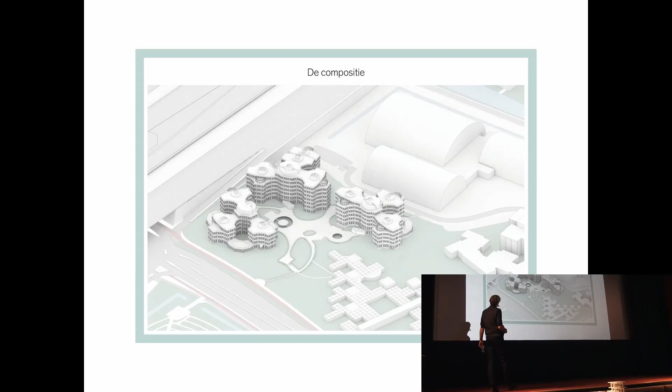Add the terraces with stairs, with greenery, and then you get this composition. Then we pair it off in the same way with a building next to the highway, so that it shelters the two buildings as a park.

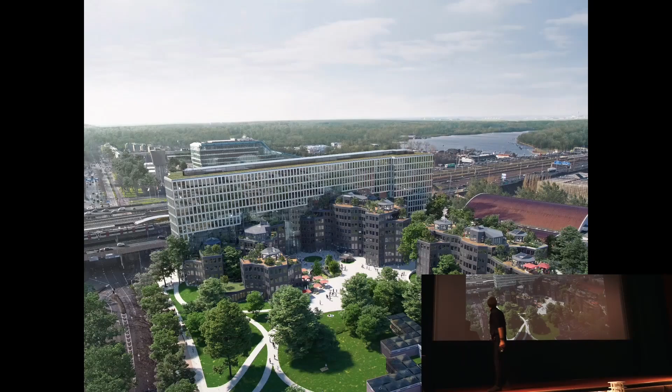This would be an efficient building, but Aldo protests, so he pushes it back into that building. So we do an echo of that existing building into the new one that leads to a street that goes in between, exactly the point of Aldo van Eyck, and that spans over this building and creates this kind of shelter of that building.

And here is how the sequence of terraces is imagined, and how the street, the in-between street and space, is then considered as the central space.

So it went under construction very quickly. We built this in one year, so it can happen, you can do it also here quickly if you want to. Inspired by Prague to do that and see how it would look like. Now we are getting into that space, into the streets, and it will open in half a year from now.

Chapter 9, I go to the green dip for a moment. That is also a way of optimizing the history. We adapt our buildings to the future.

When I looked at the Chernobyl film on BBC, you see what that has become, then you see history has transformed into this kind of feeling. And it is not only men that live in this environment, also animals live in it. So it's a kind of adaptation of a certain kind of program.

So how can we do that? I showed that in Prague, very briefly, that we would love this historical area to transform in the future into an adaptation to nature, to oxygen, to CO2 carriage.

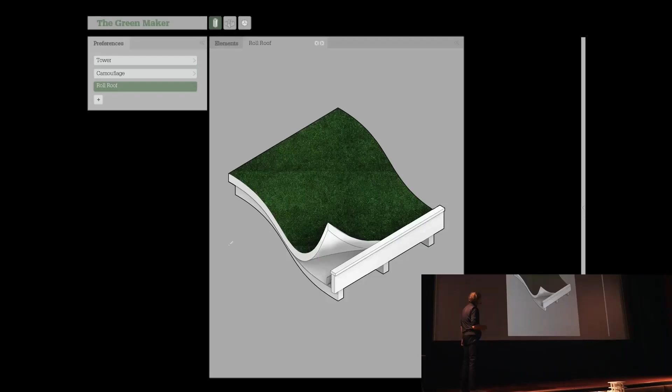So we have to design it from bottom up by making this green maker where every plant is analyzed, what it does, what it needs, and what it gives. Then you apply that in all the products you can imagine, from roofscapes to pipework, to make that possible.

You look at different cities. Take one piece in New York, select the products, put them on the facades, on the tops, in the interior, on the public space, and finally New York becomes nice, and it actually gives back something to what it consumes.

And then you get this as a Fifth Avenue dream, which we will show quite soon. So here it adapts itself, and it has the same form, but it's biological, and it gives cooling to the planet, 1 degree, if we do it for all the buildings, that could be then imagined.

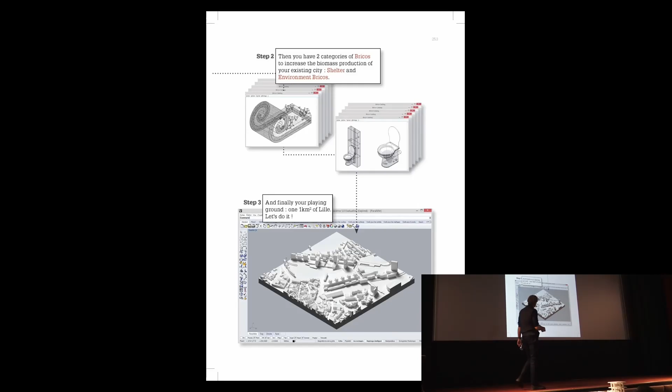So what is next is that we also allow it for animals, these characters that eat each other, and how can you facilitate that to the products, put that on these products also on the canvas. Then you get this kind of new products that are good for rabbits and for birds, and that leads to this composition, where this could be the new European capital that we could imagine. So what is next in this case?

And now we are working on food city integration. This is New York, how Manhattan is there, how much it consumes, and how much to compensate that. You can do that in New Jersey, but for the sake of the discussion, we started to see how much you can do in a stacked format. It would be the nicest Freedom Tower ever done, I would say, or you decompose it and every building does it, and then you get what every building basically consumes and needs to be compensated.

This is Troy 2.0, I would say, if this would happen. I cannot guarantee that, of course, but it helps a little bit with the understanding of what the burden is of our time, in order to take that further.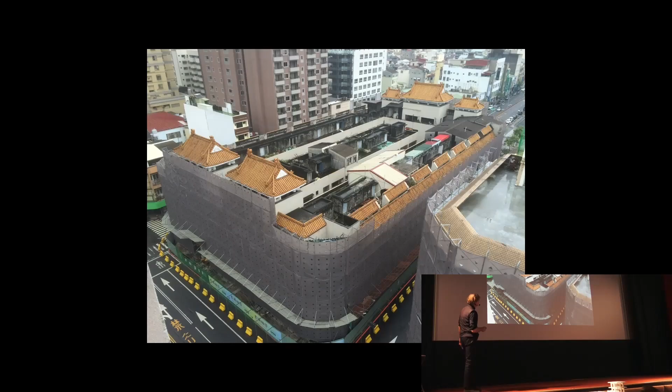I think our Tainan example is helping on that. When you have a very terrible city like Tainan, which is gray and there's no trees, and you have this building from a Chinese epoch, then the first thing you do is transform it into a cooler of the environment by getting rid of the building, but keeping memories of the past, and then flooding it with water, with plants that cool the area.

So this is what it is now. In between the ruins, like in a film of Tarkovsky, you can swim and hang out on these places. And somehow it worked, because it has a drop of 4 or 5 degrees in the environment, and day and night people are somehow enjoying that composition. So this new layer could be okay in certain cases to add that to our classical context.

And what's next? Of course, in that way, the depot is also helping a little bit on this green deal with this kind of forest on the roof. I think also our valley will do that the coming year, with the stairs, but also with all the plantation that is over there, leading to new landscapes that can be imagined, addressing this combination.

I end with my conclusion, and that's the last one. How much is the timing? Okay, it's correct.

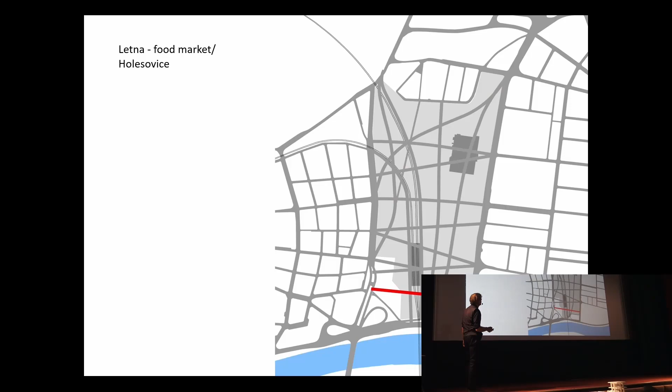I remember still Bubny, and this is an answer to that, showing how that place could become part of this area between Letna and Holesovice. And by just adding all the connections that are there in that area, it would become, I think, a beautiful city that would be then gratuitously almost done. It is transforming this gap into something like that.

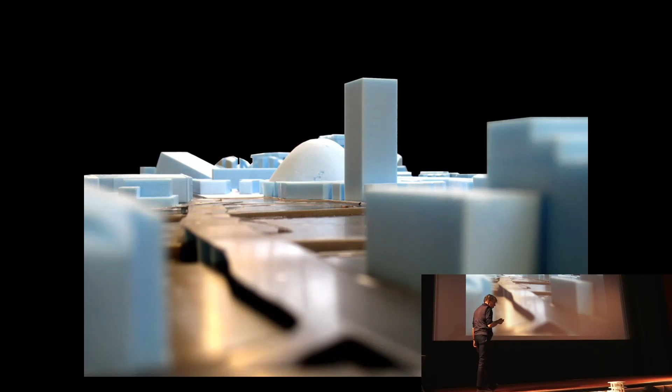Then everything is Baroque, I would say, in a very updated manner, where the existing new station will be better, and embedded in this kind of environment. So that was an exercise, which is partly going to happen in your country, to deal with history, but on the other hand also update that in terms of connections, and avoid this kind of square block terror that is sometimes happening.

So I think Grand Paris was also about that, adding to the existing stuff something. We made this calculator to say to the mayor and to the president, you have to calculate your efforts to make Paris better. And if you compare Grand Paris at the moment with other cities in the world, you can see that the public transport is not so much used as you think, and not so good as in Hong Kong.

We translated that into how much do I need to do, or add, or transform in order to optimize this climatic performance. I need to change the water amount, have more solar panels, have wind energy, change the housing because it's almost asocial, and have another kind of shopping in it.

The whole sequence was done, and then we start to make a map of how to combine it with the existing. We could imagine that all the roofs of the existing would become these solar parks, which is beautiful, because then this Haussmann gets a kind of meaning and transforms into such an agenda.

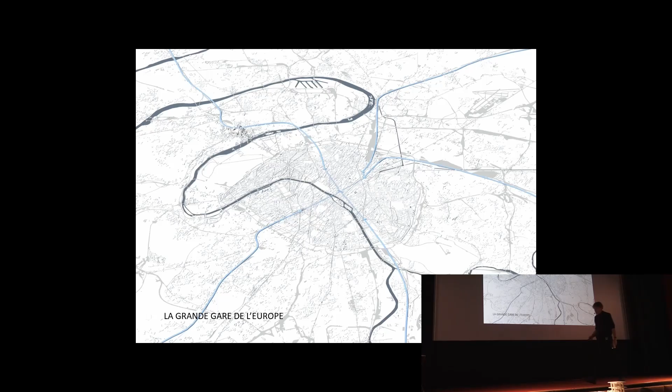I can imagine transport will be better when we stop with the stupid final stations, Gare du Nord, where we have to go for my journey to Lyon or Bordeaux. Instead you make a new central station studied with a new station on Place de la République that becomes this beautiful new dance floor, and that would repair Gare du Nord and Gare de l'Est, the two stations, into new neighborhoods, because we sync that composition.

We would transform in that process also the Boulevard Périphérique, and add there a new metro line that transforms this into a kind of new park on top of it, with buildings that are now partly under construction.

So this was an update, pieces of that view of making a smaller, more compact Paris, and repairing it. You can see the new towers emerging, you can see the solar strategy done. After 10 years, the first things are happening in this update of Haussmann, so Haussmann becomes, in that way, a facilitator. That would be a fantastic project to just think about. I don't say if it's possible for your historical cities, but it would help to update them.

In Bordeaux, afterwards, we do similar elements. It's opposite of UNESCO on the right side. This is UNESCO in Bordeaux, and when you go through it, it's a beautiful town, very bourgeois. Go over the bridge, the Garonne is wide — so that's UNESCO, and that is not. That not-part is dominated by Napoleon's army, who made this, and villages with very kind people.

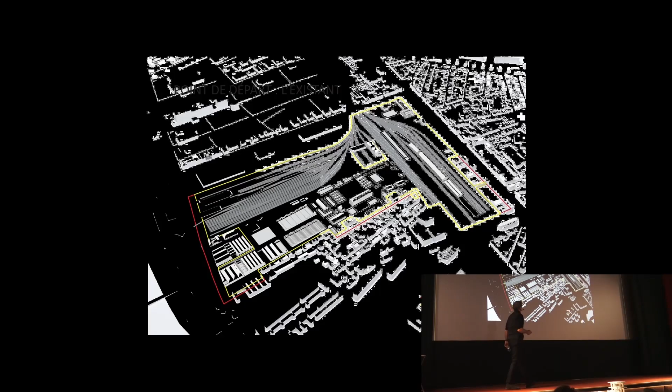So we do the first part of the transformation of the east side. This has a lot of memories of the past: rails, hangars for military, and monuments of the villages. So what can we do?

We can say every piece is a building plot, and that's to start with. Then you make an offset of those buildings of 6 to 10 meters to make narrow streets, which is very important for shadow, and you have extra plots that you could do. That leads to this kind of network — inscribed in the old, you make a new one.

A city of about 4,000 houses comes in it, which is the spaces that are imagined. Sometimes they're bigger, you can put something outside. You extrude them, and then the mayor said, this looks too much like Hong Kong, correct?

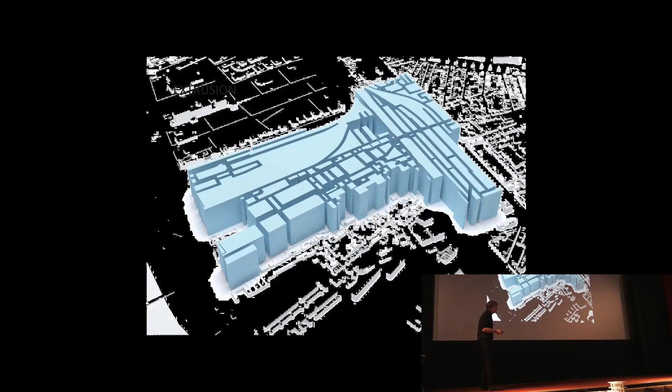So you chop them for light, so that it gets sufficient light that you can live on the ground floor. You chop them for a certain kind of sun, not too much, but at certain moments, so your sun-maker is further developed, and you accommodate where needed. You use 140 architects to interpret this landscape, and cover it with solar panels as part of it.

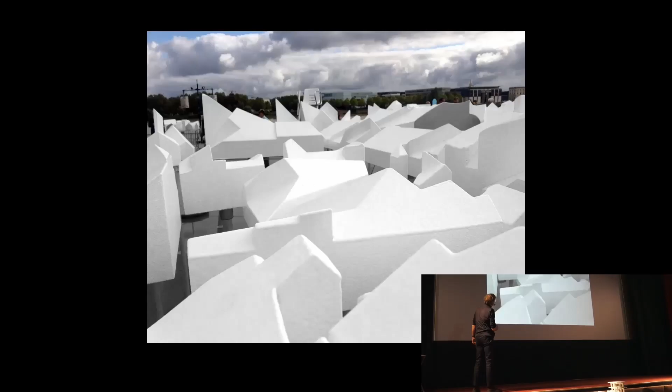This is how it becomes a blonde village, or blonde city, with a density of about FAR 2.4 — almost like Berlin, with narrow streets. These are the solar-scapes that we now construct, done with this kind of cute streets, and this new kind of landscape of albedo effect and solar panels that make it.

Then I can make a walk through that city, which is, I think, surprising. So history does it, and the performance in winter is that there is light and sufficient temperature, and in summer there are trees that shelter that. And that is tested in our models.

And that works out. This is then the landscape plan and how it will look like, this kind of emerging albino hills in this new Bordeaux forest.

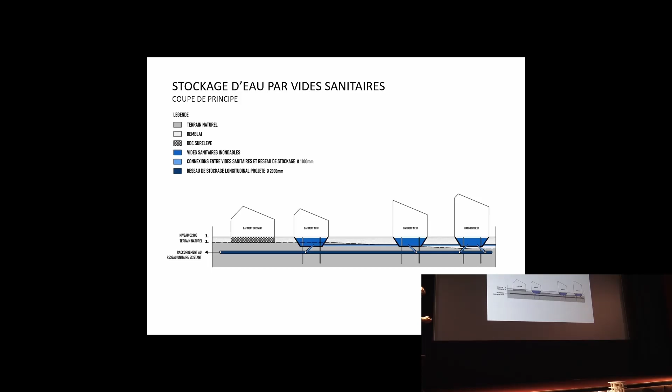There is a problem with water because the river floods sometimes, which is actually a good idea. So what we do is make cellars on every building so that water can be stored there. We had to change French law because it's impossible due to the insurance system they have. But the Dutch do it, why not there? So that happened because Alain Juppé was the mayor, so he could do it.

These are all the bassins. It becomes like the citerne, like in Istanbul, and how the projects are now going on. So you see now the first, say, mountains appearing, how this is the layer of Pompeii, as we call it. These are all the elements where the water will be stored.

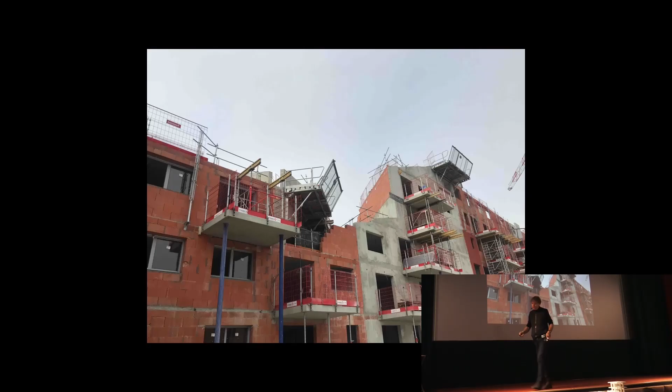Here how they are covered, and how now the small streets are coming up. And sometimes the building can be higher because there's another street, so you don't have a problem with the light at that moment. But the cuts in the building show exactly the relation between the sun and the neighbor, is what it does. So I think it's a very cohesive neighborhood. It starts to be cladded.

This is the first streets that are coming up, the first courtyards with the gardens, how they interact with each other, how step for step, 141 buildings - so I need 10 years more or less for doing that. But then it starts to come together, and you see how people react to it. You do a kind of crater of green that makes this park, so architects can react with surprises every time to make a neighborhood that is working.

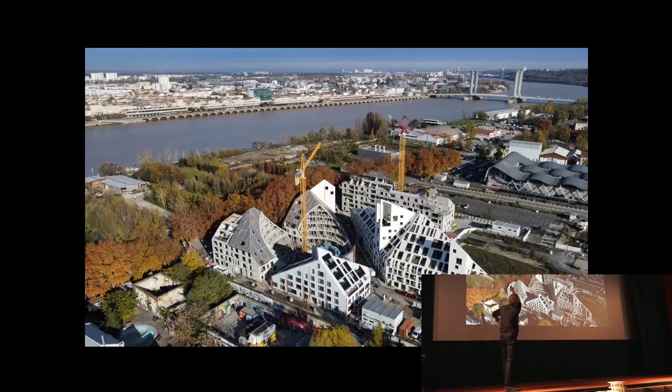And it's, on one hand, classical. It forms the logic of the entrepreneurs. It's a kind of updated UNESCO, I would say, is what we are doing here. The same laws, same gabarit as it's called, angle to describe the existing town, and same blondness or whiteness of the buildings are there. But you get an update, and you see how it would act in this relationship between UNESCO 1 and I guess UNESCO 2 in the future on this side.

So what is next? I take you to Mannheim, another urbanism over there. This is the American Kaserne in Mannheim. It's a place where we are making about 12,000 units of housing in a city that's growing quite substantially, using partly the existing structures. I will show you only a piece of it, because it's a big strategy to work with many developers to transform this monotony into interpretation of the past, but also add new things.

So we've agreed that 50% should stay, and others should be reinterpreted. So this was how it would look like, this barrack camp of that time, how we act on it, how we keep all the material - I'll come back to that later - and then start to work on this composition of old and new. And in the very heart, we make a new center. And how to make a center of it? By a couple of ways. We make a better connection.

We cut what I couldn't do in Berlin, I do it in Mannheim. So when we cut through all this building, one owner, so you can do it, and make this new street in it, we gather all the debris of the buildings in one hill, so that at one point I can have a view over it, and I can cover the Lidl, because their facades were horrible, so that makes it also bearable, and we make more density around it with this series of high-rises.

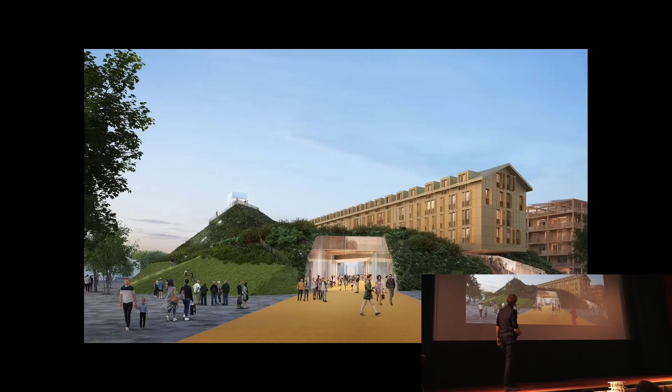Now here the cut is under construction, so existing buildings are at the moment being worked on. Here how the hill is developed and the high-rises that surround it. So how the hill becomes this supermarket area and turns into this collective point, how we use the hill also to stage one golden monument in it.

One of the barracks becomes the example of solar panels, the new golden solar panels, that the whole building will be wrapped by, so that it shows hopefully an update of these classical components. And then it's surrounded by towers.

How to make a group of towers that is nice. So we thought about statues, but then maybe an H would be good, because you have a bridge between these two towers. Maybe one which has a beautiful podium inside with a stair and has this kind of O feeling. One where an entrance to the area can act with the sports club, and becomes the new Brandenburger Tor of Mannheim from the highway.

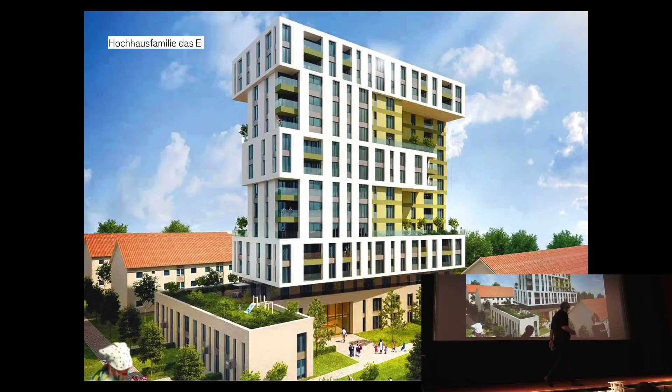And then, this is by Albert Speer, a building with bigger balconies that turns it into an E, and it makes, I think, the word home finally there. From Heim to home. This gives address to Merkel's, say, campaign, who loved it.

What is then next? Actually, I showed a collection of interpretations. I think collecting, like this table, is a kind of beauty. Collecting people is a beauty of differences that can be done.

So what did we do recently for Art Basel and for Frieze, is to make a kind of interpretation of collecting. A small film that dreams of a city where everything is artistic, because mostly everything is functional and boring, 90%. Artistic is more than only beauty. It's also about freedom, it's about criticism. And that could turn our cities into a kind of biennale of interpretations.